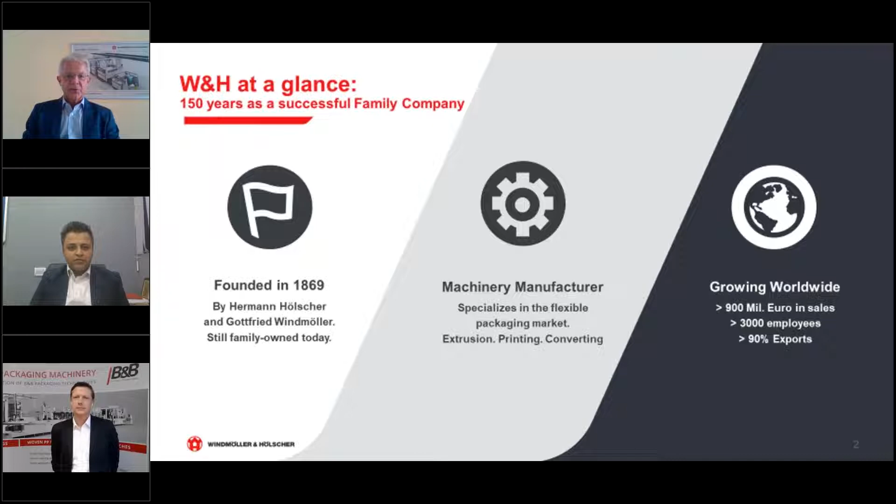Windmoeller & Hoelscher is a family company and in business since over 150 years. Windmoeller & Hoelscher is a machine manufacturer which specializes in the flexible packaging market, and key traits are extrusion, printing, and converting. We see a global growth, and turnover will exceed 900 million euro, which is a fantastic number. We have over 3,000 employees, and 90% of our production goes into exports. Next, please.

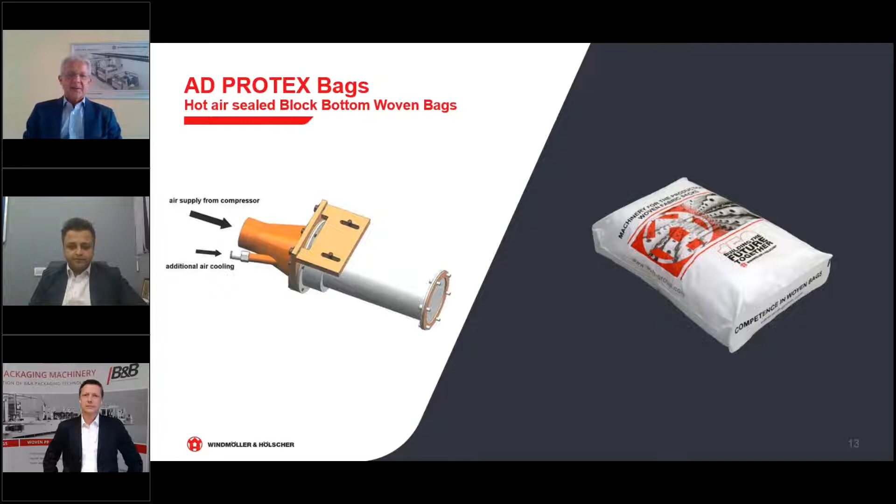Today we talk about block bottom bags. A block bottom bag is made from a coated tube of woven fabric just by hot air. We don't need sewing, we don't need glue. I will focus later on the production process more in depth, but what you see here is the key. We produce in one step with hot air a bag which has fantastic properties. Next, please.

Mr. Rakesh already pointed out some of the opportunities of block bottom bags. Historically, stitched bags did play and do play a large role in the Indian industry. The block bottom bags are able to offer additional properties, additional advantages, which make them the bag of choice for more and more users. It's environmentally friendly, it is pilfer resistant, tamper resistant. We can apply an effective micro perforation, on which I will highlight a little later. This allows air to escape out of the bag when we fill it later on. It is not so easy to counterfeit. It is not easy to mix it with other bags. It is easy to handle and to stack because it has a brick shape. And as I already pointed out, we just use hot air to produce it. It means it is adhesive free.

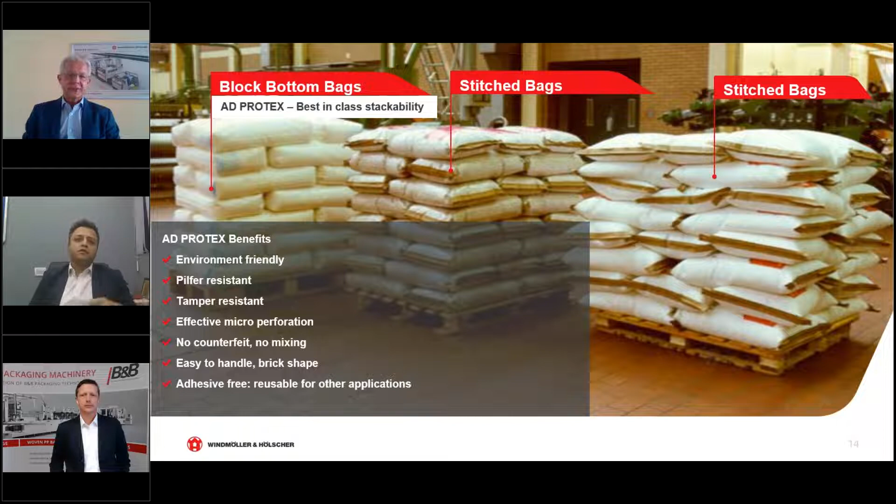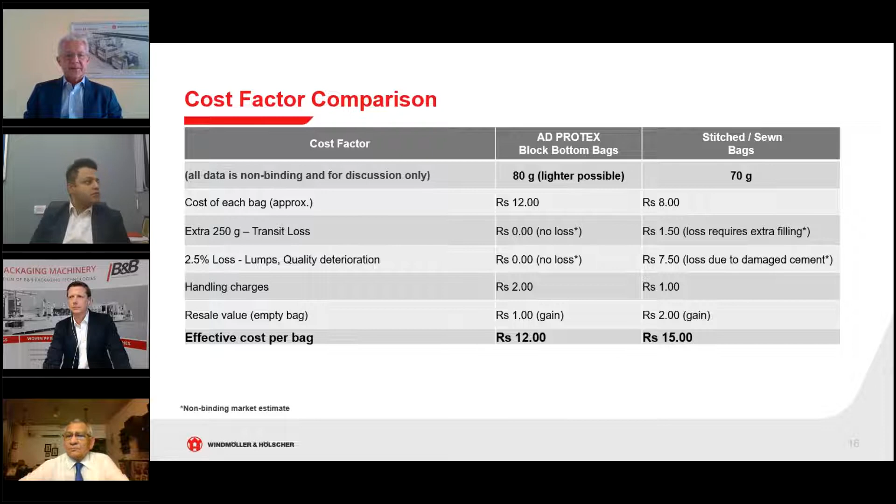The cement companies benefit greatly from this new sack. There's no loss of product while handling. We see a full benefit to end customers in terms of cost and product. There's a strong brand image, and it's easy to print on the bags. You can see logos and branding, which wasn't possible with plain bags, becomes now possible with block bottom bags. The consumer feels a pull toward appealing and better packaging, and will prefer the nice packaging over the simple plain bag. That allows cement companies to fetch a better price and also meet international standards of packaging for export.

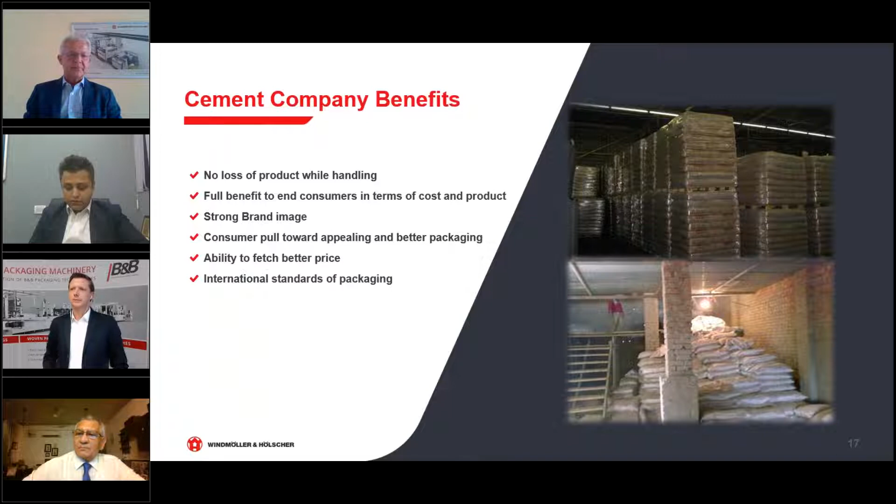This is a sample picture showing our Convertex CL140. For those not familiar with such a machine, in the forefront you see an unwinding stand for a woven PP tube. This tube is unwound and goes into a perforation station, which provides the holes needed for air to escape when cement is loaded into the bag later at the cement company. Next, a cutting unit cuts off a piece of the tube, which then makes a right turn into the rest of the machine. There, a valve is added, along with a bottom and top patch, all attached to the cut-off tube by application of hot air. In the end, you get a completely ready-to-use, ready-to-sell bag, with very good bag tolerances at very high production and consistent quality.

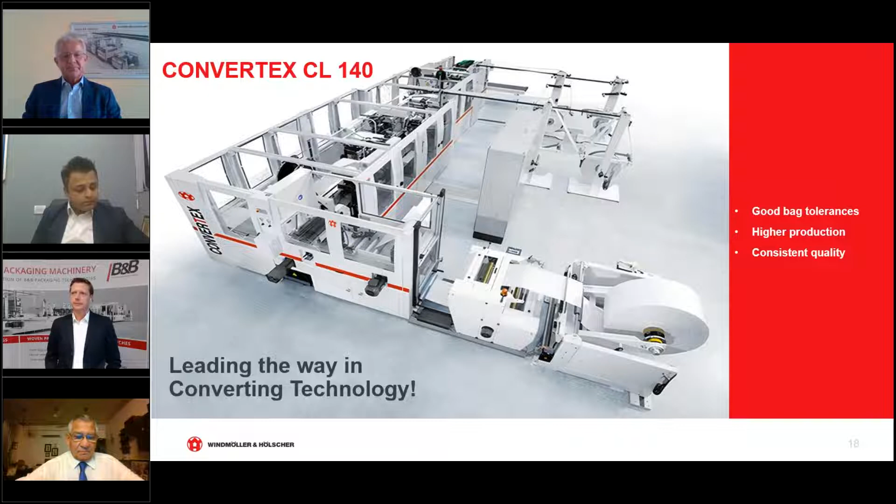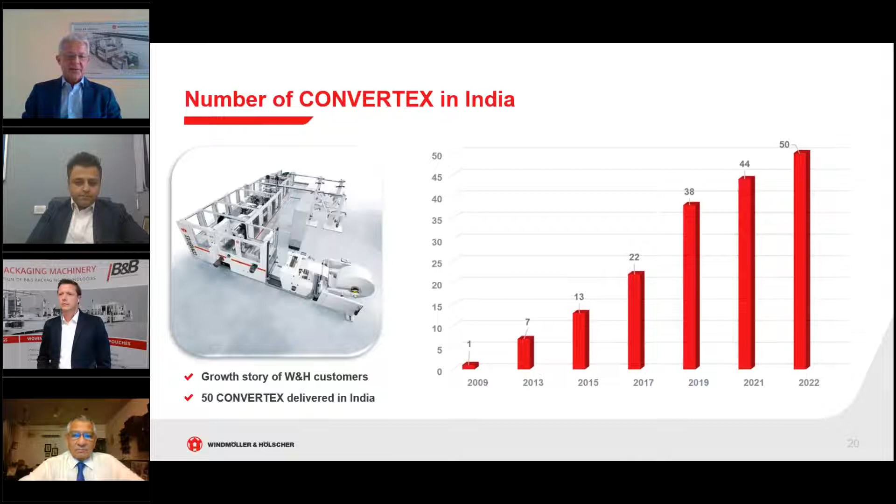This happened in 2009 when the first Convertex made its way into the Indian market and was a complete new innovation to the industry. From then on, growth took place with increasing sales, as I showed you in the graph before. The cost per customer falls, profits rise, increased number of customers came into the market, and more competitors also entered. That is the normal way in a product life cycle with a growing product.

And we see block bottom still in this growth area. We don't see that the potential is already used up. There is tremendous more potential, as you will see a little later on.

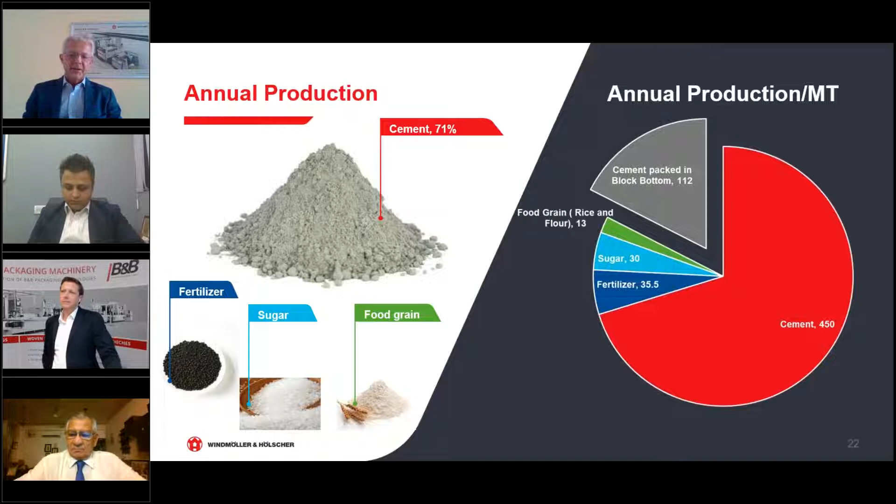Our vision for sustainability, green innovation. We see that PP is 100% recyclable. It is leading in sustainability. A circular economy is possible, especially because the bags are made of one single polymer family.

The possibilities in future are less power usage, reducing carbon emissions, and especially less raw material. When you use less raw material, immediately your power usage goes down, and your emission of carbon dioxide goes down.

Other possibilities are less waste in the production of the bags and in transport of the goods. No loss of cement into the environment is a key element which is provided by block bottom bags. And all in all, it also provides high cost savings.

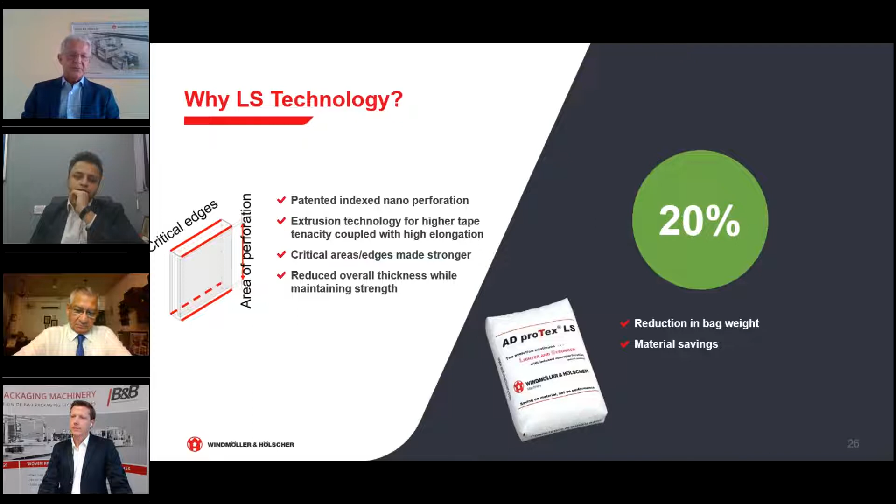The potential needs to be discussed between the producer, the cement company, and the logistic process has to be reviewed. It's not a simple do-it-and-it-works situation. It has to be discussed in depth between all involved parties to make it work, but together there is certainly a possibility, a potential.

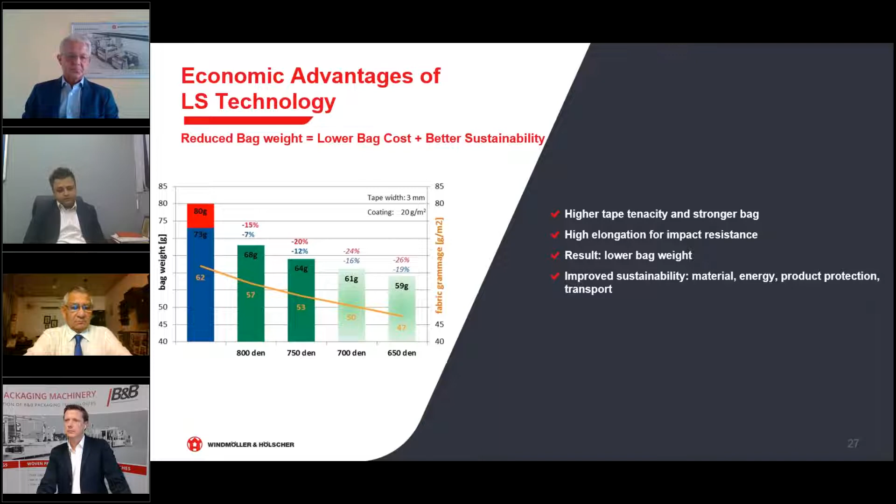Another potential is to make the bag even nicer. The consumer would prefer to buy a nice bag compared to a simple non-branded bag. Already the block bottom bag was allowing prints on the patches and on the bag to make it appeal to the end user.

By using a BOPP lamination on the block bottom bag, this goes a step further. The aesthetics get much better, you can get a glossy texture, and you have even higher consistency and flatness on the bag. You get some shower-proofing in nature from the BOPP, and all in all, a high quality printing which was not possible to do on normal woven PP.

So there is a lot of additional potential in the aesthetics of such bags. When we look around the world, especially in South America, we see a lot of BOPP laminated bags used for animal food and seeds, where the appearance of the bag is key, and the printing and lamination quality are of extreme importance to the acceptance of the bags. I think there is a lot of possibility for the Indian market to develop further in this direction.

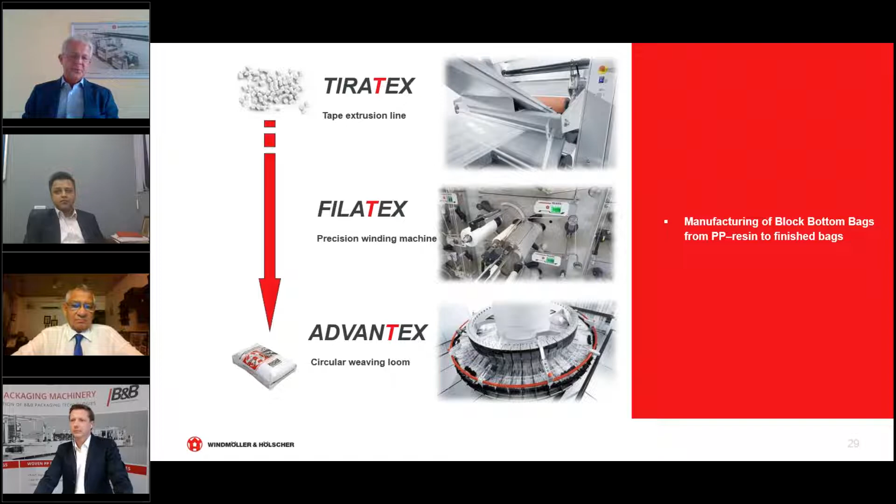For those of you not already in the woven industry, here is a short overview of how the process goes from a PP granule to a completed bag. First, there are tape lines which extrude tapes. Those tapes are wound by precision winding machines, and the wound-up tapes are then inserted into a circular weaving loom, which creates a tube, a woven tube. On the next page, you will see the next steps.

The next step is coating the material with a PP LDPE cover. This cover is then later used for the hot air sealing of the patches and is used in the Convertex to make a completed sack.

In a printing machine, you can apply your logos, you can apply information for the end user, you can apply all the information that you feel important for marketing. Once the tube is printed, coated and printed, it is brought to the Convertex machine, which then converts in one step from the roll of tubular fabric into a bag.

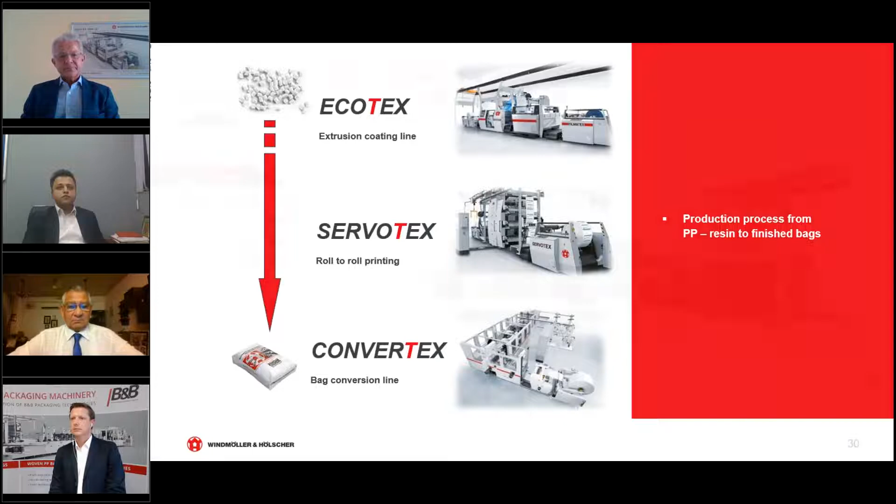There's also another way to make bags if you go from flat fabric. So far, I have spoken about tubular fabric as a starting point.

When you have flat fabric, there's a possibility to apply even more than a BOPP layer. You can apply several layers of material and tailor your product even more. You can do designs according to your customer requirements. You can use 1 or 2 ply configuration for valve bags, pinch bags, gusseted bags. You can combine woven PP, laminates, paper, PE film. The possibilities of combination are basically endless.

There's always a possibility to come and visit Windmoeller Hoelscher and see how such application works and how it helps into getting into the pinch bag area, which Mr. Peter Bäumer will focus on in detail after my speech. You see here the link from one technology to the other, and that is the tubing of several material layers.

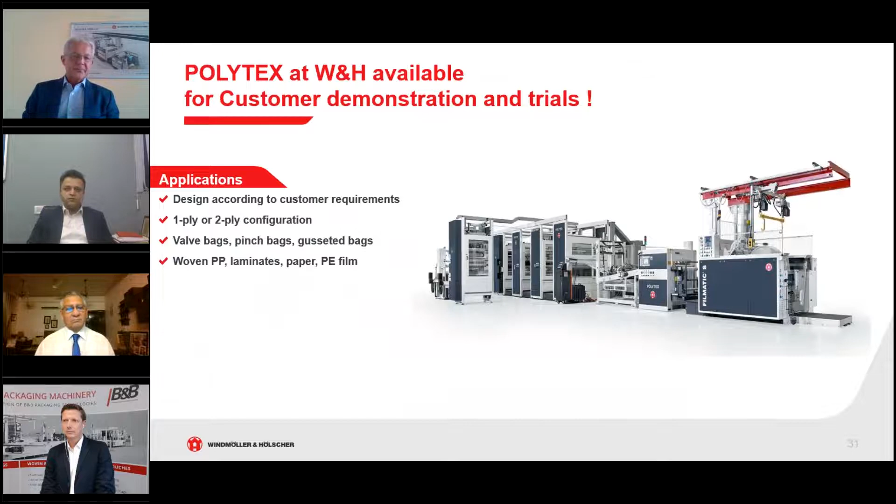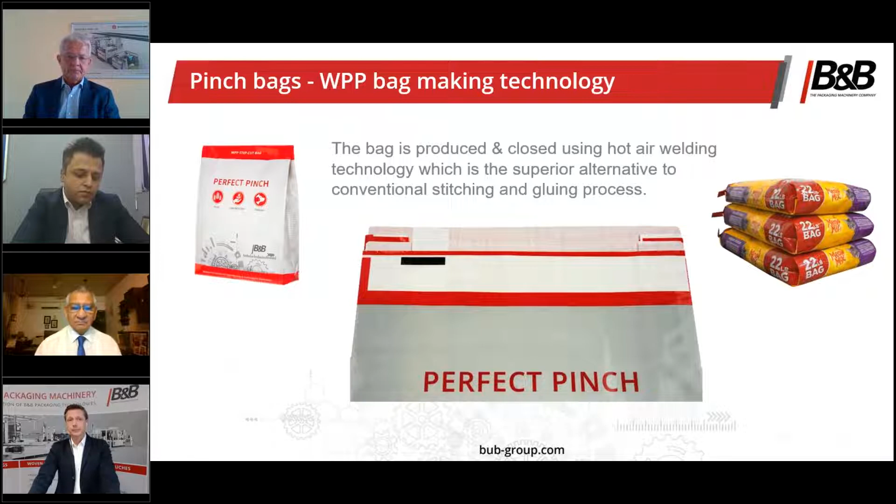The shelf life of today's woven bags is limited due to leakiness. By using woven pinch bags, the shelf life can be massively increased.

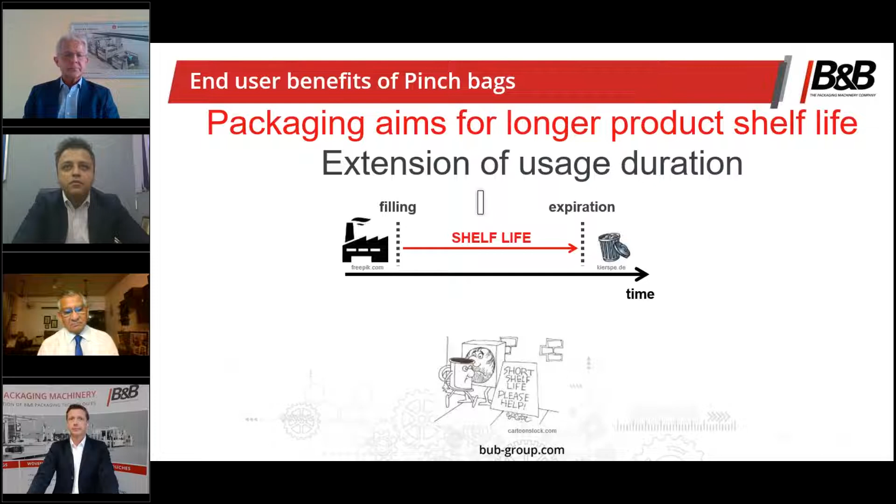Moreover, woven pinch bags offer more protection as they withstand wet conditions.

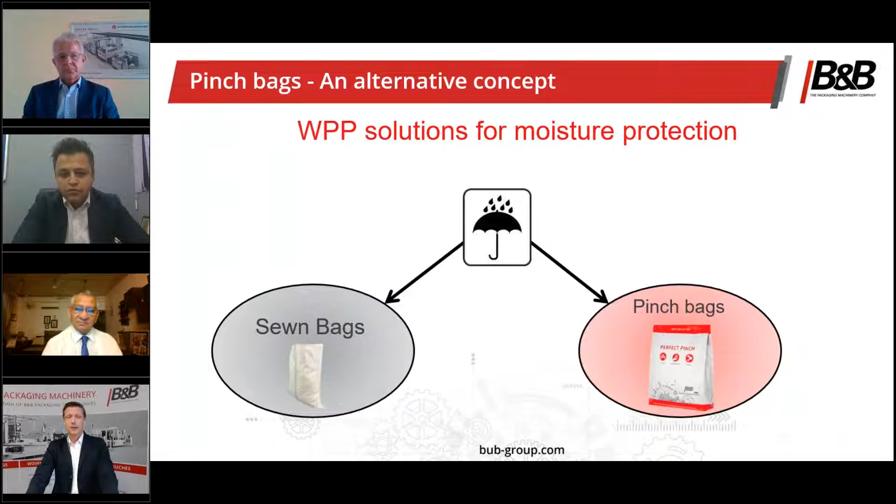As Mr. Heder already explained, woven bags and especially woven pinch bags can be used for multiple different kinds of packaging, such as rice, general food, pet food, seeds, or chemicals, just to name a few.

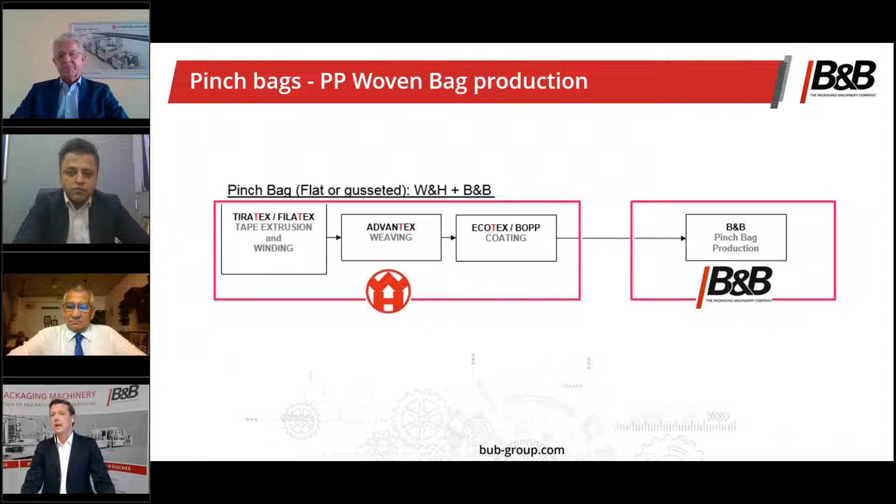To produce a woven pinch bag, first of all, you need the right equipment to produce the woven material itself. Tape extrusion, winding, weaving, as well as coating equipment is necessary, and W&H will be very enthusiastic to discuss the details with you, I'm sure. The converting equipment is manufactured by B&B, and on the next slides I'll give you some insights.

For today's woven pinch bag machine, we are using more than 10 years of experience coming from more than 25 delivered machine installations all over the world.

We are using an inline production process, working from one flat film roll. In the first part of the machine, the perforation of the web, the tube forming, and the bag separation are done. The second part of the machine goes all the way to the stacking conveyor.

The pinch is being closed in this part using hot air technology. A B&B robot packaging unit can be integrated behind the stacking conveyor so that the bags can be packed into cases right away.

The automation of bag production gets more and more important. Customers demand a reduction of operators and packers needed for machine operation. Thus, B&B machines are equipped with an automatic format change system with motorized adjustments. Using this system, recipes can be saved so that positions of the different machine modules can be recalled automatically for future productions.

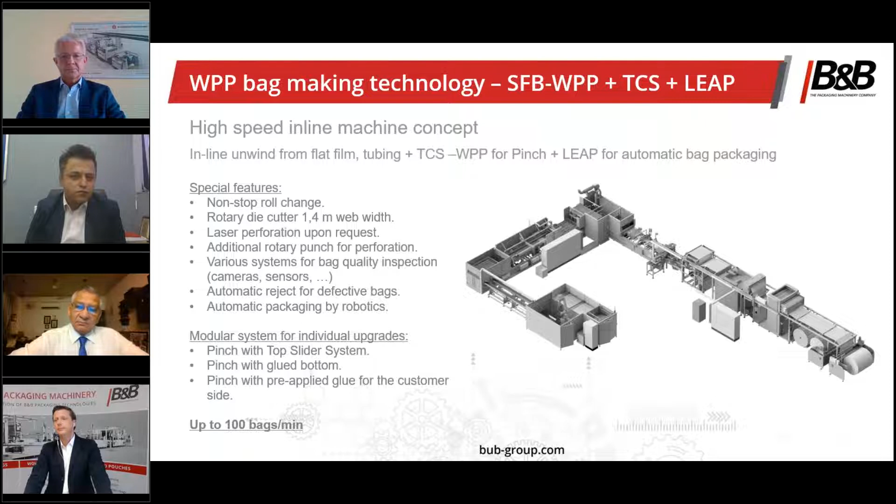Key point in the production of woven pinch bags is the perforation for the step cut pattern. First machines on the market used a laser for the step cut perforation. A laser has the benefit that it can be set up quickly for new programs.

B&B has very long and extensive experience in developing and manufacturing rotary die cutters for various applications in converting machines. Consequently, a laser is not the right medium for us to do this perforation. The disadvantages of a laser are too comprehensive. A laser, for example, always applies the same power to the web, but varying power is needed to separate the perforation with web thickness variations. A laser can lead to web breaks in the machine, as well as problems in the separation of the bag from the tube. And the costs for a laser are initially very high, same as the maintenance cost.

Using a rotary die cutter instead has a lot of benefits and advantages. The most important point is that the perforation quality does not depend on the WPP thickness and homogeneity. As a result, there is no variation of the tear-off force. The B&B die cutter works with very high precision—the true running accuracy is less than 5 micrometers.

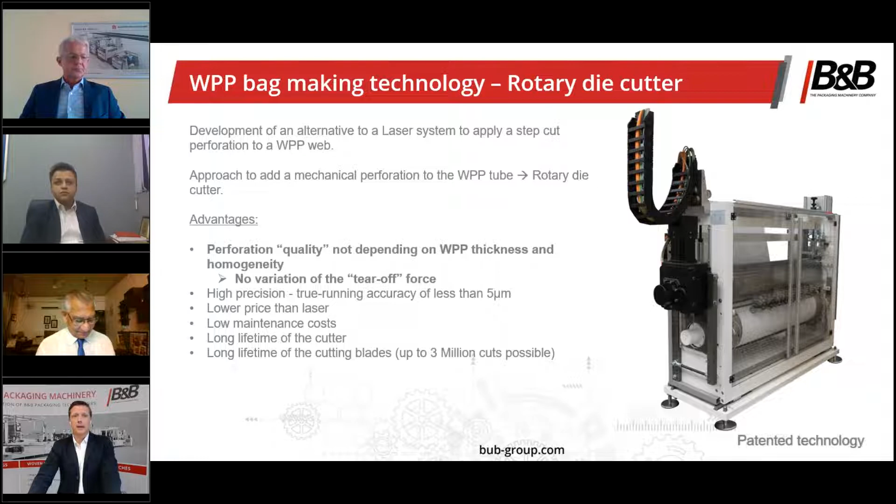Like I mentioned before, pinch bags can be closed by hot melt or hot air. Hot melt can be applied on the customer side and plant side of the bag. The plant side is directly closed during application. The appearance of the step cut area is good, but from our point of view, it has certain disadvantages.

First of all, you have to deal with glue. Different glues are needed in changing climate conditions. In the worst case, filled bags can open depending on hot or cold environments. Glue is an additional material involved in the production of the bag, which creates a mess in the machine. Frequent cleaning needs to be taken into account. During transportation, empty bags can stick together on the open and closed side. In hot weather, glue might start melting.

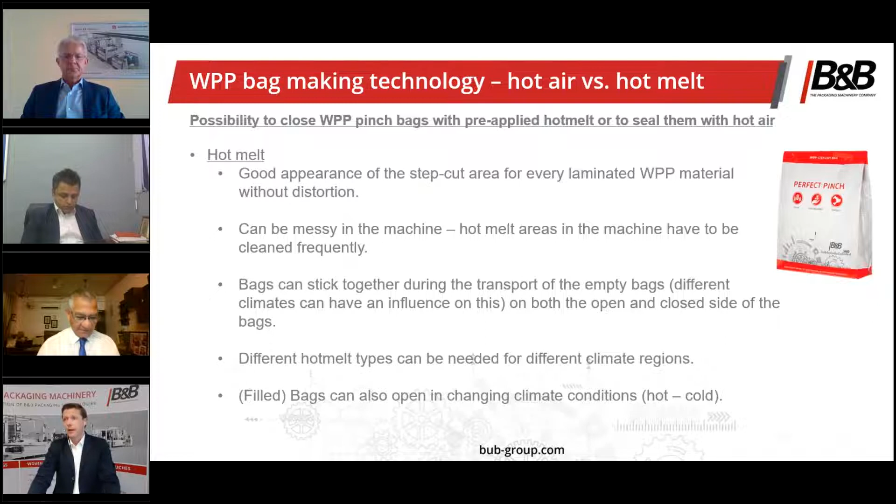Therefore, we've been working on alternatives during the last 10 years. Our favorite and today's standard in our equipment is hot air technology. The benefits are obvious: hot air sealing results in superior strength and perfect appearance of the bags. Your production does not need to plan downtime for cleaning purposes, and you're independent from changing climate conditions. You don't run into any risks, no matter if you're shipping empty or filled bags.

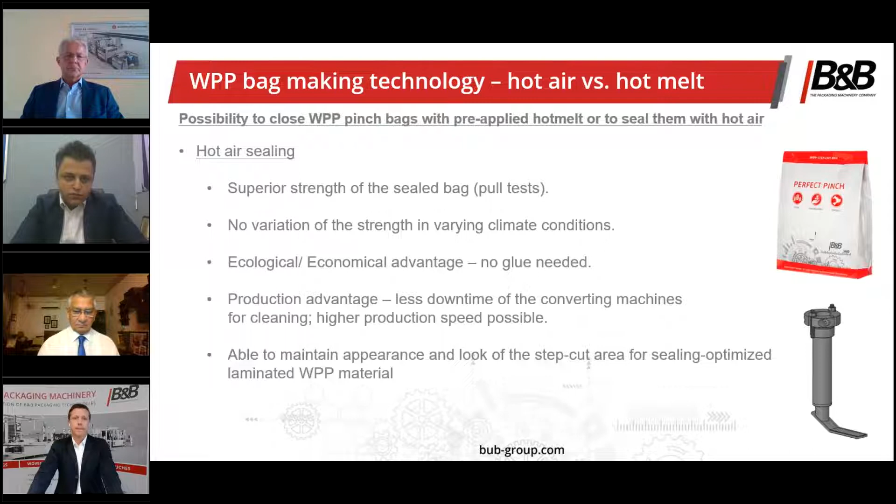As mentioned before, customers are frequently asking for automated packaging at the end of the machines. For this, we are using a customized robot cell. Nevertheless, the customer needs to ensure that the bags which should be packed by a robot are of the right quality. Otherwise, an automatic packaging system is useless.

For this, we have developed quality inspection systems. Depending on what the customer would like to detect, we are using camera systems to check, for example, the geometry or the print position of the bags. In addition, the length of the bag as well as the quality of the bag seam can be controlled. Again, the bag needs to be produced perfectly, otherwise additional automatization makes no sense.

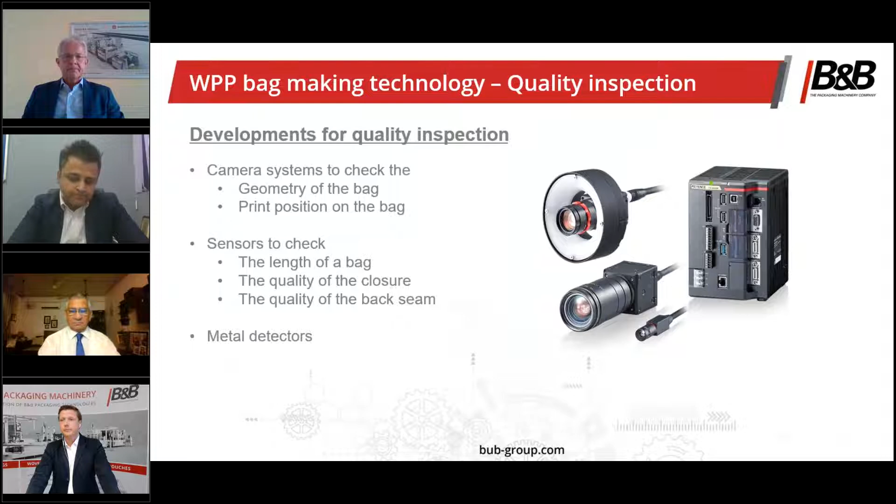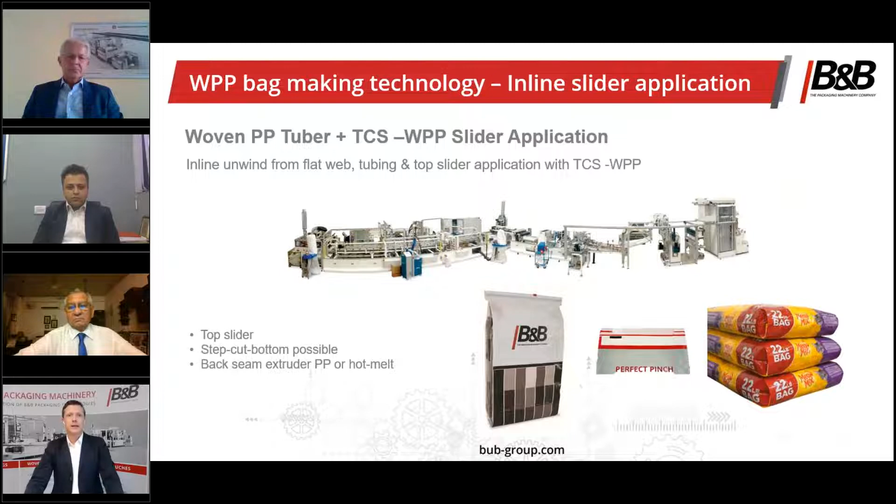Over the years, we've put a lot of work into the development of woven pinch bag machines. At one point, our customers were facing a problem in regard to closing and sealing the filled pinch bags properly. Filling equipment and existing sealers were not able to achieve a consistent closing result. Why that? Problems lay in the imprecise feeding of the bags to the closing unit. Only sewing or double folded bottom were available as closing alternatives, coming along with several disadvantages like low performance, no tight bags, or material waste in case of double roll bottom.

B&B has developed sealers, including aligners, which work for fabric, paper, and plastic, and this at speeds of more than 65 cycles a minute. The key is the accuracy of the alignment unit. With this, you can ensure 100% straight aligned, precisely closed bags. It is possible today to place such a hot air sealer right behind a filling machine.

Thank you. Next slide, please.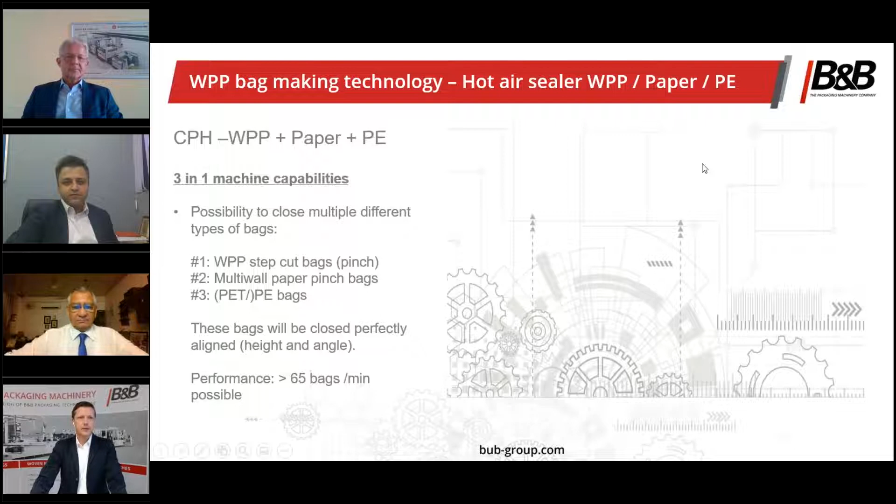Not every customer needs a sealer which is equipped for all possibilities. In consequence, B&B has developed an entry-level version only for woven pinch bags, which is suitable, for example, for semi-automatic filling lines.

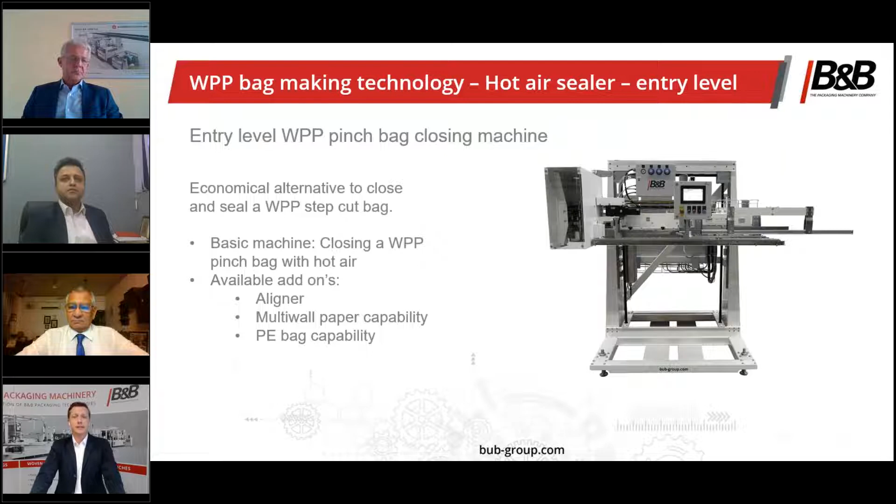To summarize the benefits of pinch bags once again, using hot air sealing technology will lead to no more sewing, no more gluing. You have minimum or zero spillage. After closure of the bag by using hot air sealing technology, spillage is nearly impossible. This is important for product safety during the supply chain. It is cleaner, safer, and easier to work with. An optimal palletization is possible due to perfect shape.

And when we are talking about shapes, this is also something which makes the woven pinch bag very attractive, the shape itself. Another big advantage: no counterfeiting. The bag is produced using advanced technology equipment, and thus it is difficult to replicate without such equipment. This will help your brands to fight against duplicity. And as the bag consists of PP, it is fully recyclable, and so it is environmentally friendly.

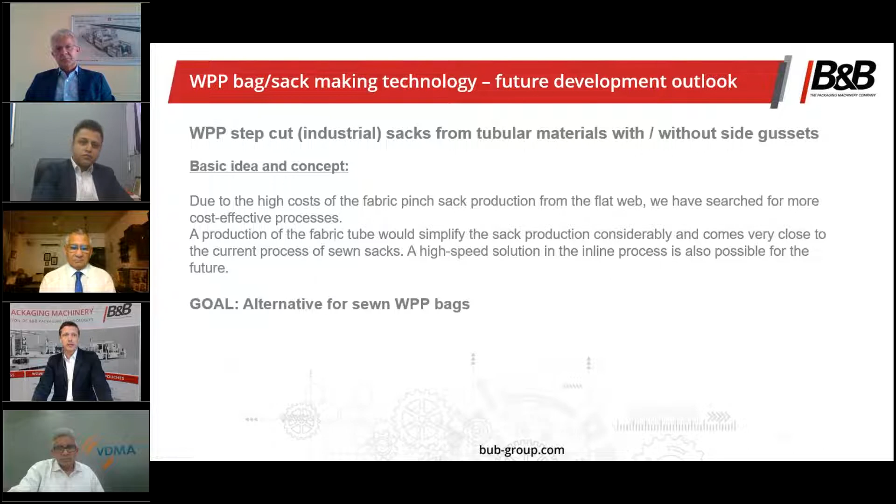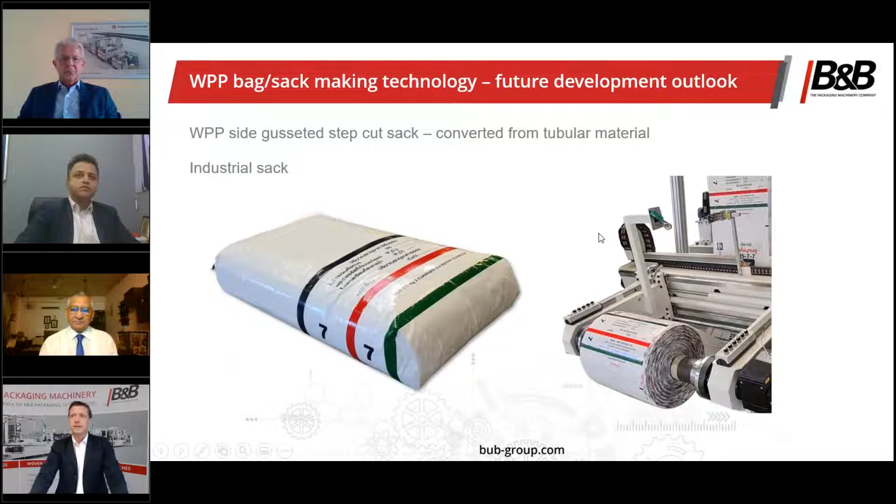Another idea is to produce a woven step-cut pillow sack without any side gussets. Again, all sealings have been done through means of hot air. Maybe this would be the cheapest woven sack possible to produce.